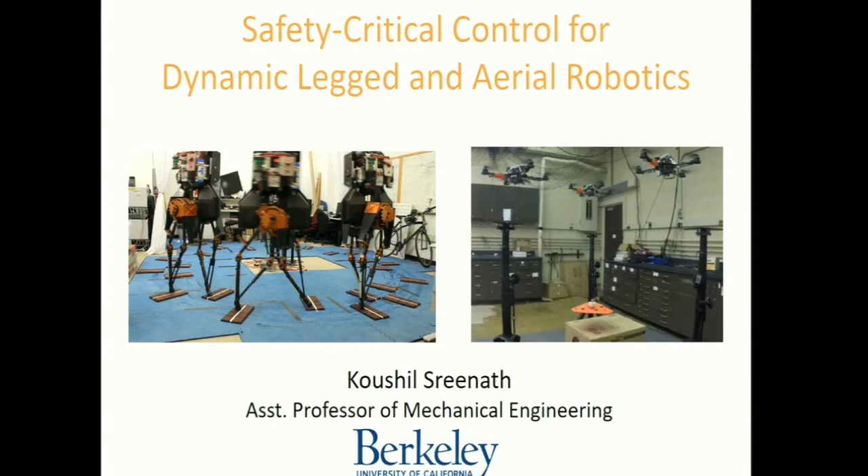So why do we want to work on legged robots? To motivate this, let me show you a video. This is a video of a snow leopard chasing a mountain goat on extremely rugged terrain. What you'll notice is none of these creatures miss a single step. Their feet don't even slip, and this is at high speeds. This is live action. These are amazing creatures. Our robots come nowhere close to the performance capabilities of these animals.

One of the goals that our lab has is to enable robotic systems to operate at such high speed on extremely rugged terrain.

Don't worry, it's a happy story. But actually, it's a sad story in a way. People feel sad for the goat, but actually it's the leopards that are going extinct. You don't realize that.

Another research thrust that we have is to work on aerial robots. To motivate why aerial robotics, let's talk about what's happening or what's going to happen in the next 5 to 10 years. These are urban cities, densely populated. 75% of the world's population is going to be in these dense urban cities within the next 10 years. This is great, but the only problem is if you want to transport anything within a city, it's super hard. We have scenarios all around the world with traffic jams everywhere. So if you want to transport a small package, in terms of time and money, it's going to take a lot of inefficiencies.

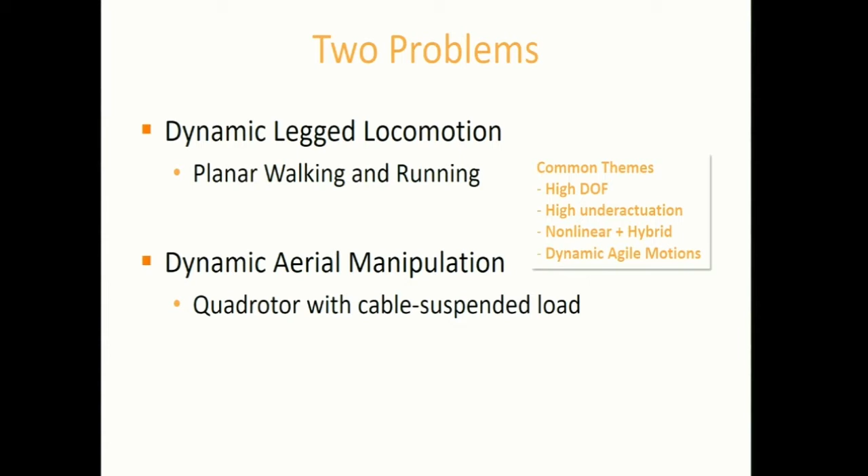Today I'm going to talk about two of these problems: legged locomotion and aerial manipulation. So just to give you an idea, this is safety critical control applied to legged locomotion. You want to walk fast on terrain made of stepping stones. If you miss a single step even by a few centimeters, your whole robot falls. It's a safety critical constraint that has to be enforced while you are also respecting the dynamic constraints.

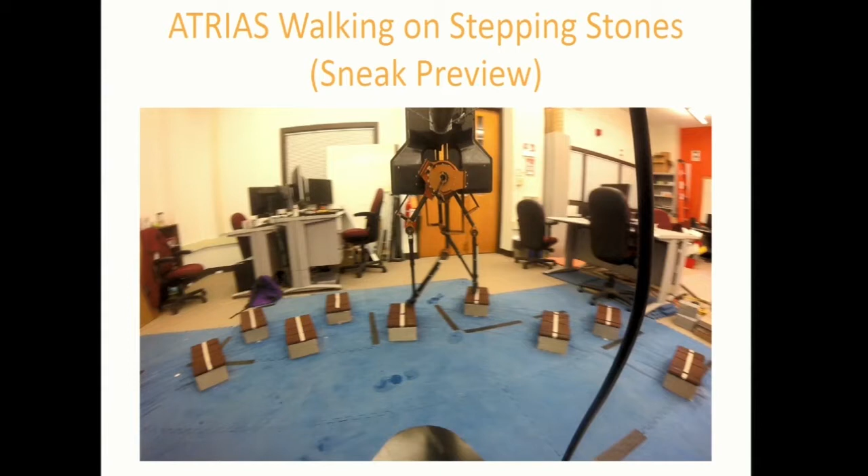The second problem: we want to design controllers that can track the position of the payload along a desired trajectory - not the aerial vehicle, but the payload. There's a lot of under-actuation because this cable is freely suspended, so you can oscillate. We want to solve the problem not only for a single aerial robot, but for multiple aerial robots.

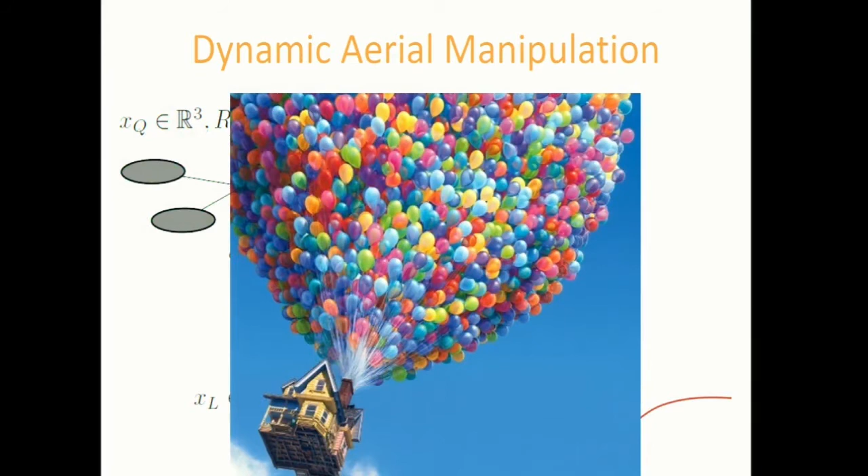This is a challenging problem. The dynamics are complex - you have nonlinear dynamics, you have hybrid dynamics. For aerial systems, you have dynamics on manifolds. The controllers not only have to enforce a static equilibrium, but actually a periodic equilibrium that involves stabilizing to a periodic orbit. You need to achieve geometric control to give you global stability properties.

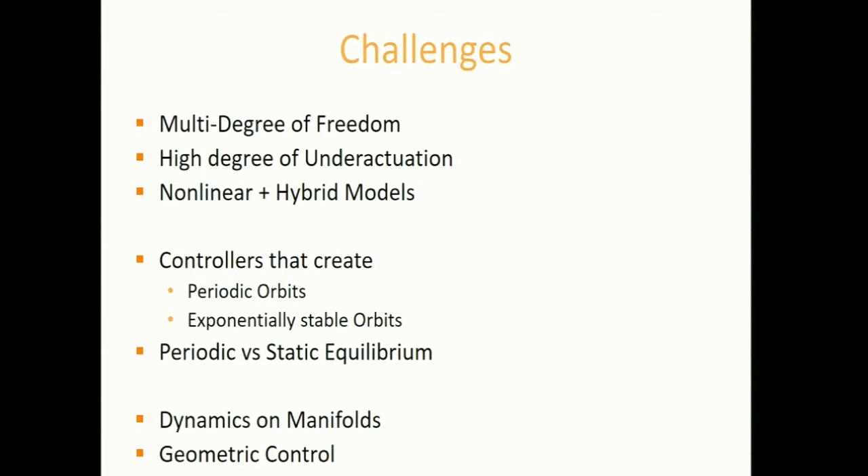Towards this, we'll look at control approaches that go along three different axes. We'll start with standard controllers, then extend that along the constraints axis, the model uncertainty axis, and the safety axis. So we look at standard controllers that can work for nonlinear hybrid dynamics, for under-actuated systems, and for periodic orbits. Now we look at CLF controllers - control Lyapunov function - that can do this. We'll extend this to control Lyapunov function-based quadratic programs where you can enforce additional constraints.

We look at robust and adaptive formulations, which can enforce model uncertainty. We look at safety critical constraints using barrier functions - this is like walking on stepping stones. Finally, we'll put all of these together to do constraints, uncertainty, and safety together at the same time.

First, let's look at the models for these two systems. Whether you take a legged robot or an aerial robot with a suspended payload, both are described by hybrid models - you have a nonlinear, under-actuated model. When the foot hits the ground, there's an impact map that transitions into the flight phase for running or walking. Similarly, when the tension in the cable is non-zero, your cable is taut; when the tension goes to zero, your cable becomes slack, and you have a transition map that gets you back.

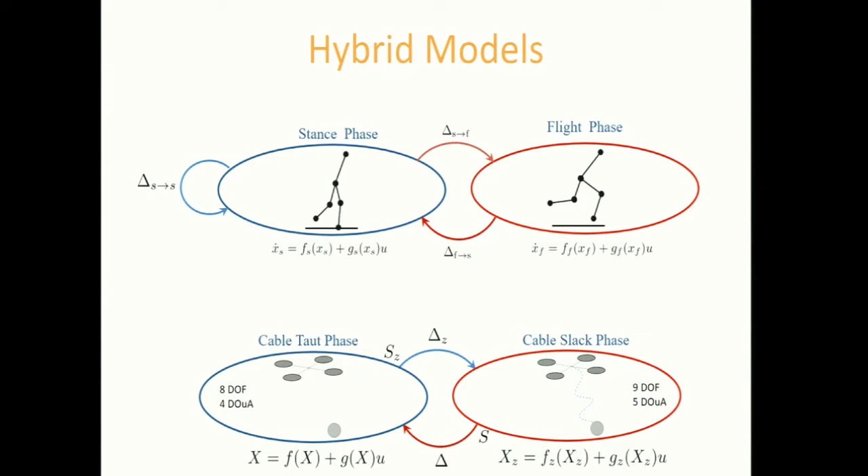If you look at one of these for aerial robots, these models are fairly complex. For this system I'm showing you, it has four quadrotors with a 5-link cable and a rigid body payload. This has 58 degrees of freedom, and 42 of those degrees of freedom are under-actuated - they're not actuated. So it's only the difference that you can control.

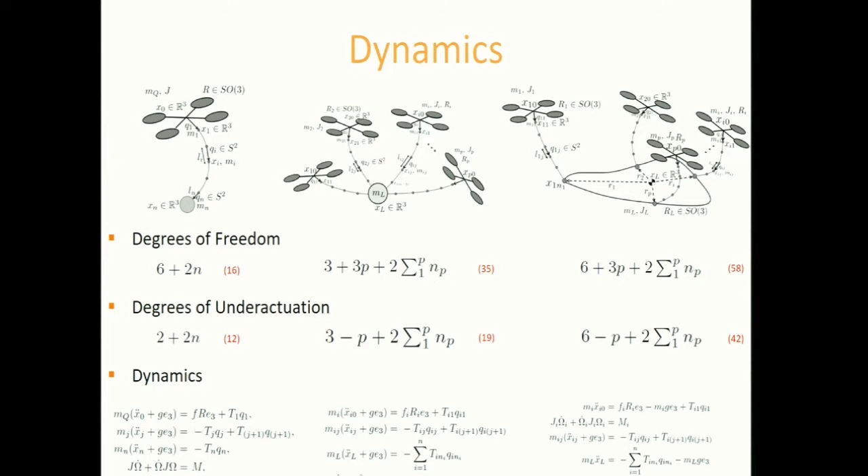You can develop the models for this, and we can also develop controllers for these things. So once again, you want to design controllers to track the desired trajectory, either for a single or multiple aerial robot. Let's dive into control design for a legged robot.

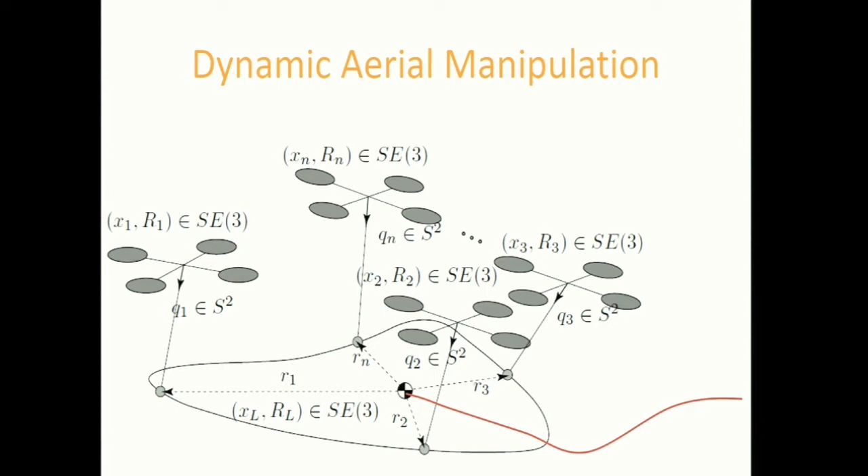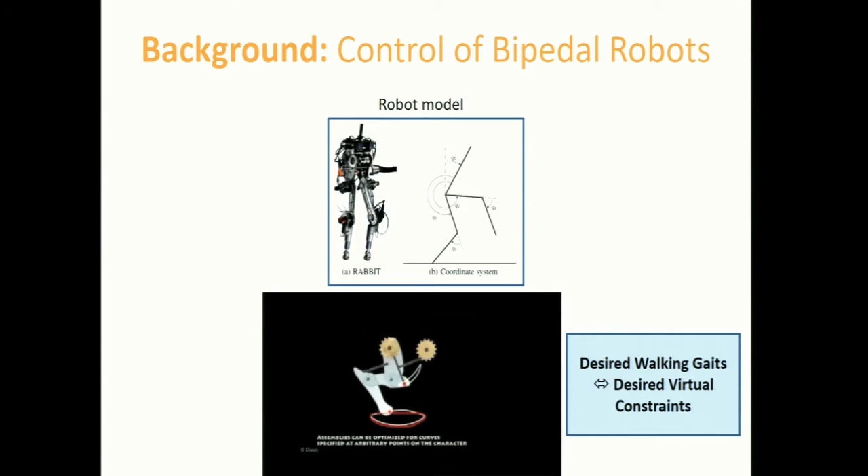All right, so here we have what are called mechanical constraints enforced through gears and links. These constraints can be represented by an equation y. So you drive this y to 0, it enforces these constraints. Now this is a toy.

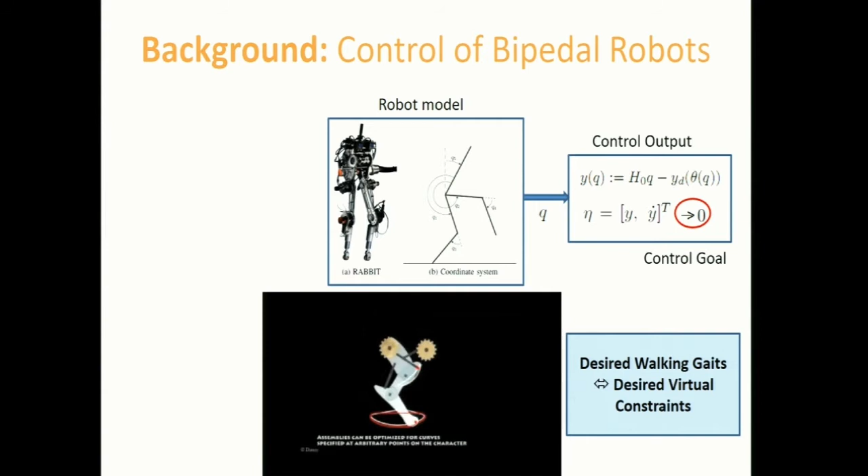For a robot, we don't have these links and gears, but you can enforce and create these constraints virtually through motors and feedback control. So I want to design a controller that drives y to 0 and y dot to 0. That's my control goal.

An easy way to do this is input-output linearization, and you get a system which is linear in terms of the output. So the output dynamics is a linear system. A linear system, you can use your favorite linear controller. Here we'll use a simple PD control, and we can design a walking gait for this system.

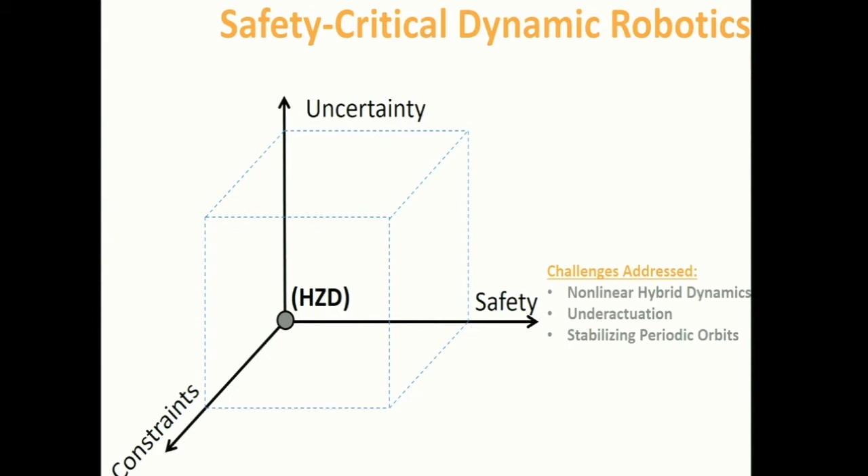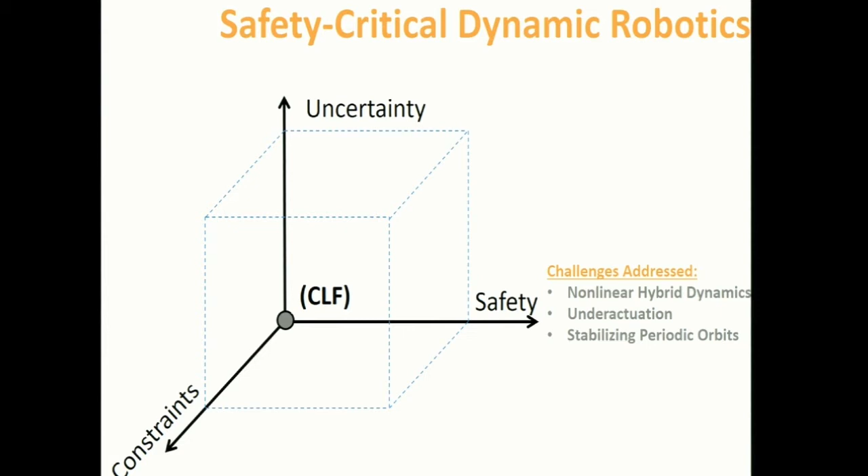So this would give you the hybrid zero dynamics component of the control. What we want is we also want to enforce constraints, safety, and model uncertainty. So let's look at how we can enforce constraints through control Lyapunov function-based quadratic programs.

So let's go back to this. With our control, what we have is a linear closed-loop system. If you have a linear closed-loop system, we can create a quadratic Lyapunov function. And if you design a controller that enforces this particular constraint on the Lyapunov function time derivative, your V goes down to 0 exponentially, the Lyapunov function, which means your output goes down to 0 exponentially, and then it enforces your goal.

One controller that can enforce this is a min-norm controller, which is given by this. So as long as this is negative, your control action is 0. If this is non-negative, it takes the smallest control action to enforce that this is less than or equal to 0.

So I'll show you a video where this controller was implemented on the robot Mabel. You'll see that this part of the experiment, which was the input-output linearizing controller, these are the torques. They're going bang, bang, bang. There's a lot of noise. And once you switch over to the min-norm controller using the control Lyapunov functions, the torques are a lot more smoother, and more importantly, it's energy efficient.

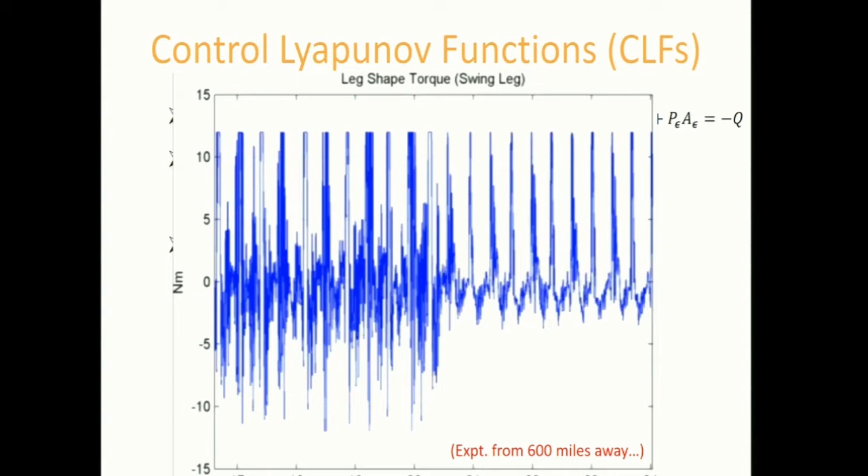So try to listen to the robot here. All right, there's no sound here anyway.

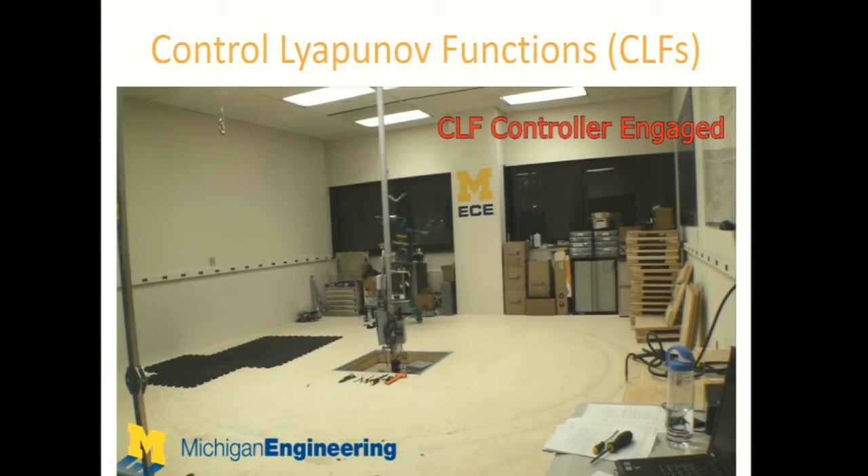So here's Mabel that's walking around, and we switch over to the CLF-based controller. This controller is being executed at 1 millisecond, and it's a lot more smoother and more energy efficient.

Now, once you have this control based on the CLF, you can also create this CLF-QP, which is exactly equivalent to the min-norm controller, which enforces this particular constraint, which is the same thing.

Question: so for the Lyapunov function, this whole design is based on the input-output linearization. That's right. Is it always possible for bipedal robots to do the linearization, or is it something about the structure of bipedal robots that allows us to do so? So for these particular systems, it's possible to do input-output linearization. There could be some designs where it's not possible, so you need to check for input-output linearizability.

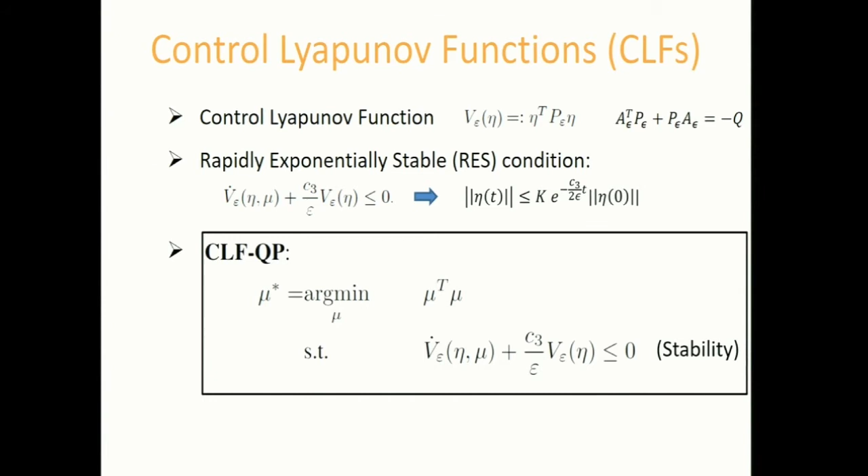Okay, so once you have a quadratic program, you can also put in additional constraints. And these could be in terms of torque constraints, force constraints, friction constraints, and so on.

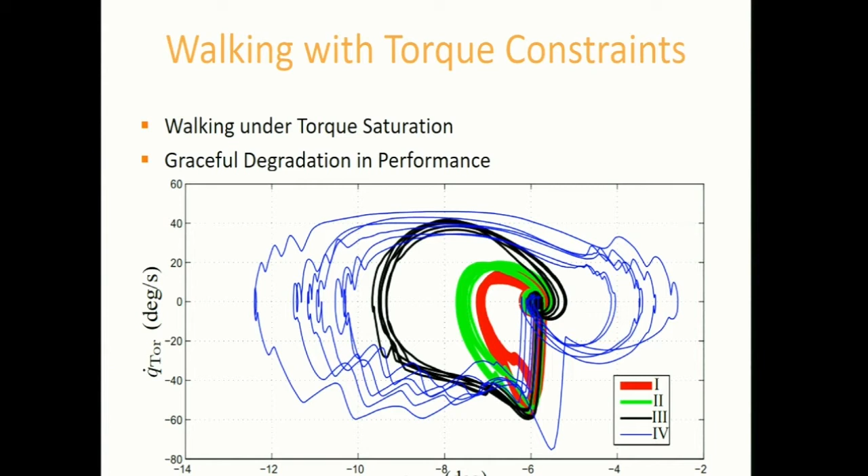Now you can extend these control Lyapunov functions to systems that evolve on manifolds. These are for aerial robots with suspended loads, for instance. So here you can look at the covariant derivative, which describes the dynamics of the system on manifolds. You can create a geometric Lyapunov function, and you can enforce this geometric Lyapunov function-based control.

So here's some examples. This is the largest possible error for the system in terms of orientation. The quadrotor is inverted, the payload is inverted, but the controller is still able to track this desired reference trajectory. You can do this for a single quadrotor with a suspended payload. You can do it for multiple quadrotors as well.

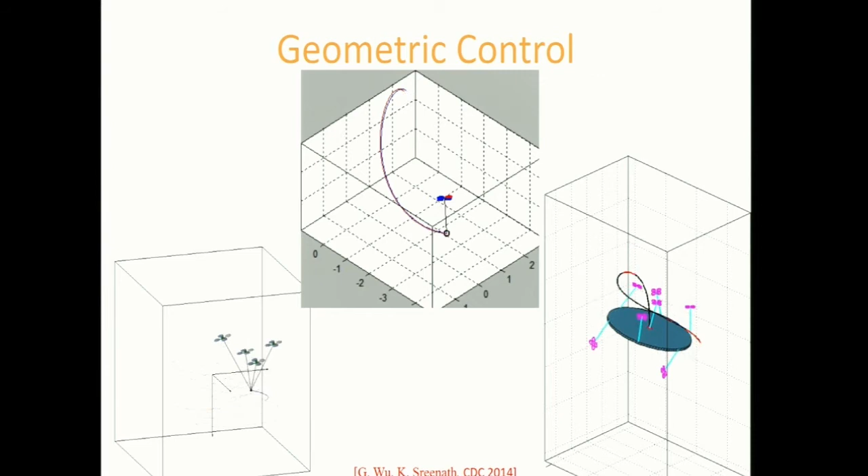Now we can also look at the case where you have a single aerial robot, but the cable is now not one link, but made of multiple links. So here the goal of the controller is to make the payload follow this desired trajectory. So we started off with a hover configuration.

In the next video, we'll start off with the inverted configuration. So there's a huge error in the attitude. The controller recovers from it, and it's still able to track this trajectory. So you have global stability properties for configuration errors and orientation.

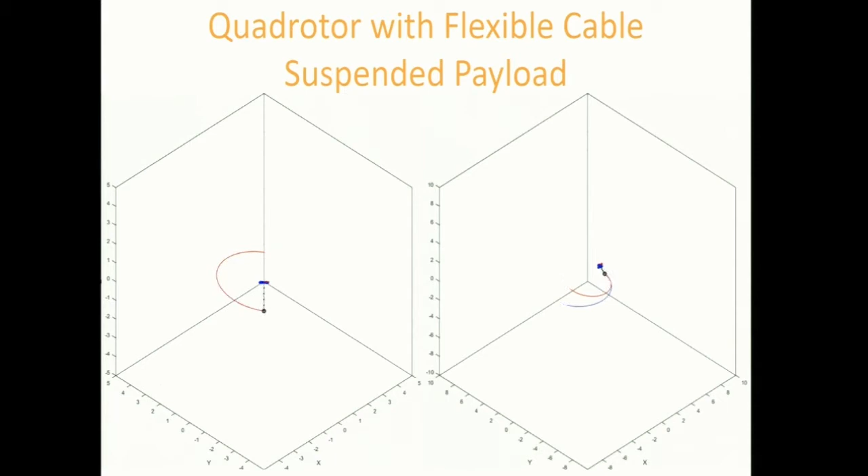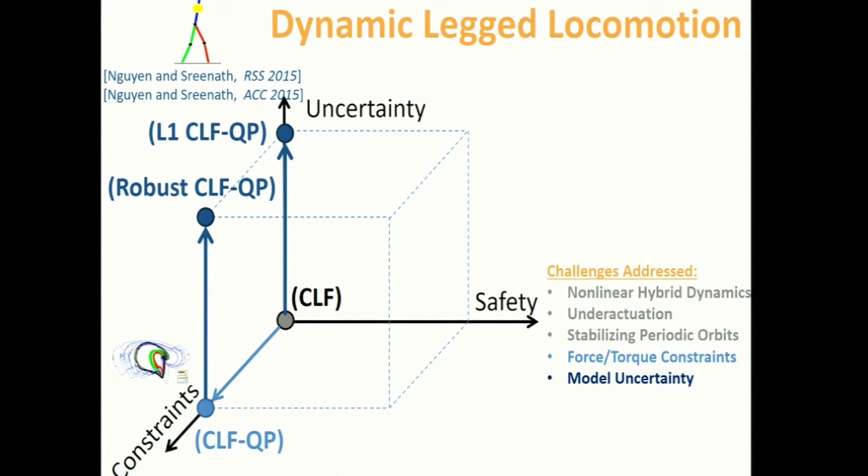All right, so we've looked at control Lyapunov functions for quadratic programs. Now let's look at model uncertainty. Our group has looked at robust and adaptive formulations to address model uncertainty. I'll talk about one of those and present the results for the second one.

What we want is walking robots that can walk without the controller being aware of additional uncertainty added to your model. This isn't just an example from the web, it happens in real legged robots. There's model uncertainty because the models you derive aren't always accurate. You have parameters from carrying packages that you don't know, ground disturbances could be model perturbations. So there's a huge amount of uncertainty.

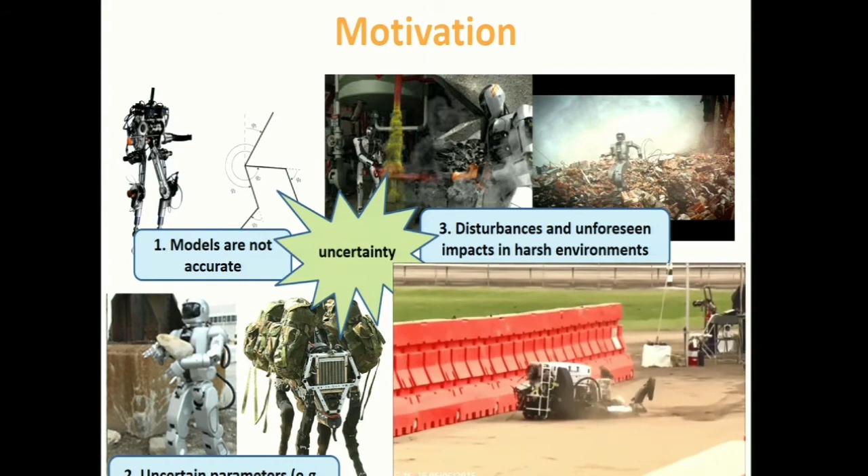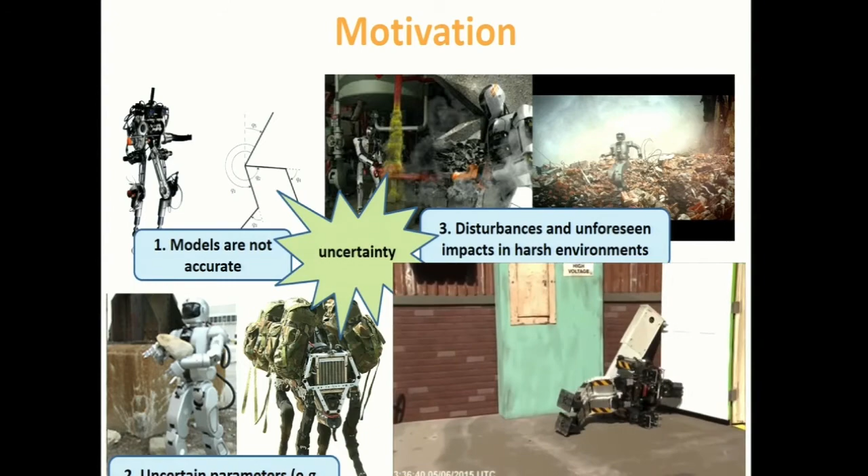Here's a video, overused, from the DARPA Robotics Challenge. I would say most of these failures are because of model uncertainty. The methods applied didn't take into account the uncertainty. Almost every single robot in the DARPA Robotics Challenge fell, except one.

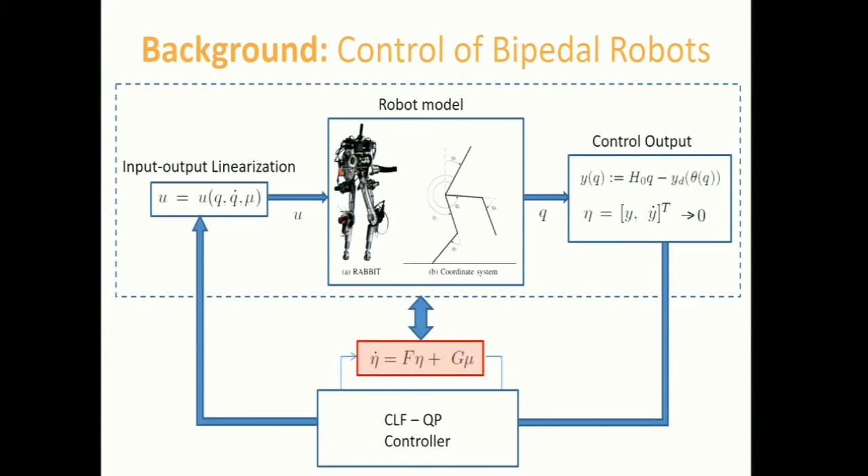So let's look into how we can address model uncertainty. What we saw before, we had a linear system, and we can have a control Lyapunov function-based controller for this. Now when you have model uncertainty, this linear system has unknown parameters which are nonlinear in terms of the unknown model. You want to design a controller for this system where delta 1 and delta 2 are not known.

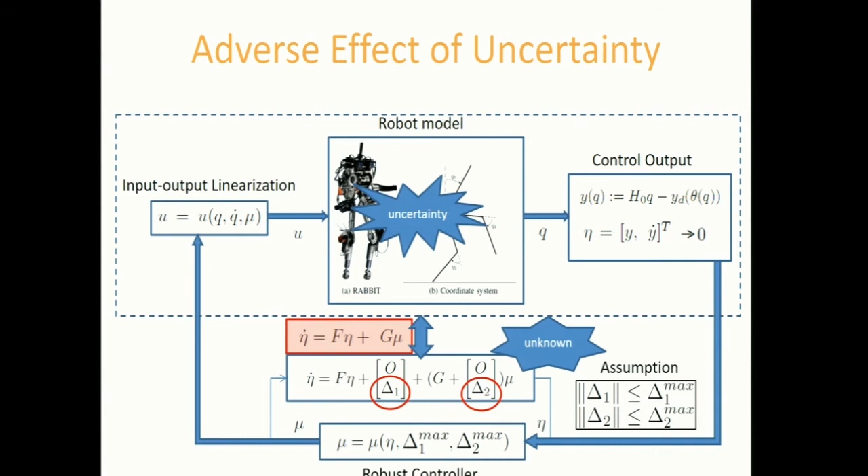If you make an assumption that these uncertainties are bounded, then you can design a controller based on the bound. Looking at Lyapunov functions, the condition we wanted to enforce was this, but because of uncertainties, we now have this new constraint. If these uncertainties are bounded, then enforcing this max inequality constraint still guarantees convergence to zero for the Lyapunov function under these constraints.

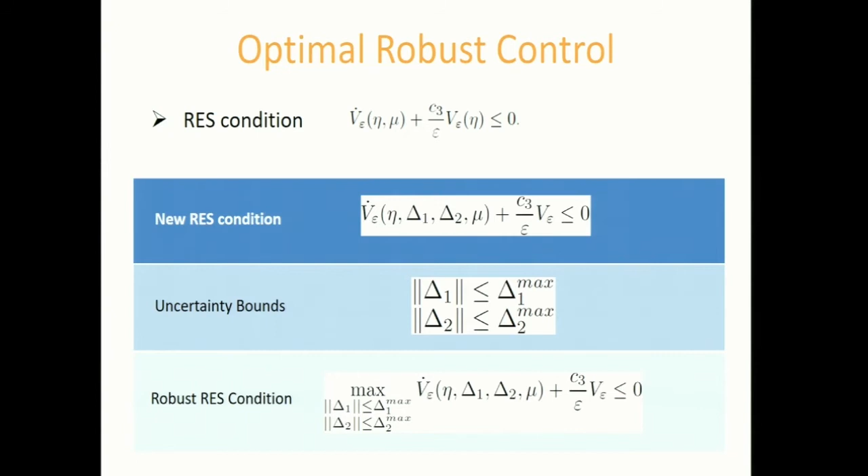So your CLF-QP now looks of this form. The key thing here is your Lyapunov function is still affine in terms of not only the control input, but also the model uncertainties. And this lets you implement this as a quadratic program.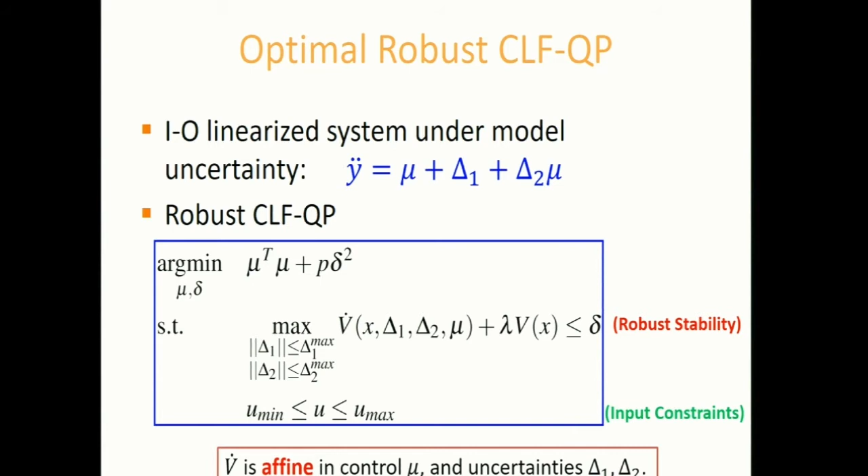So we're looking at some experimental implementations. Here is a 70-pound mass that's attached to the robot. So we can stand, we can do a little bit of walking. We're trying to submit this as a journal soon.

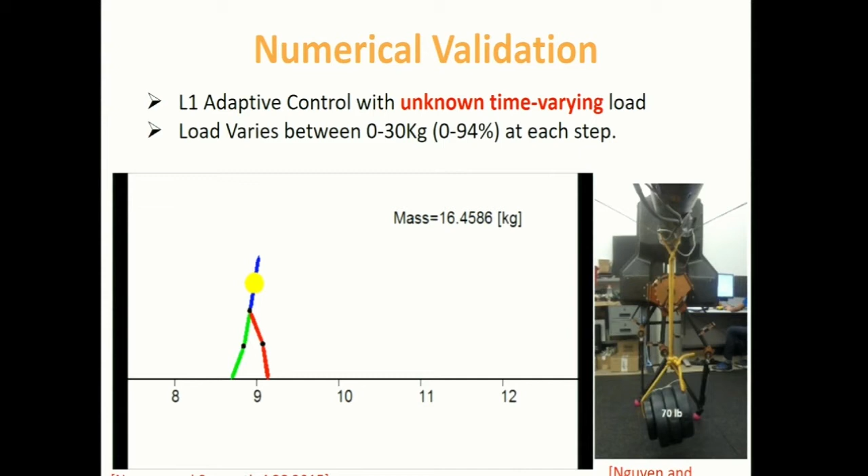So we've seen legged robots. This controller can also be applied to aerial systems. This is fast motions with large errors, large attitude maneuvers. This aerial robot has a 100 gram mass payload, about 10 centimeters from the center of mass, and the geometric adaptive controller is still able to regulate and track a desired trajectory, a circular trajectory at 3 meters per second.

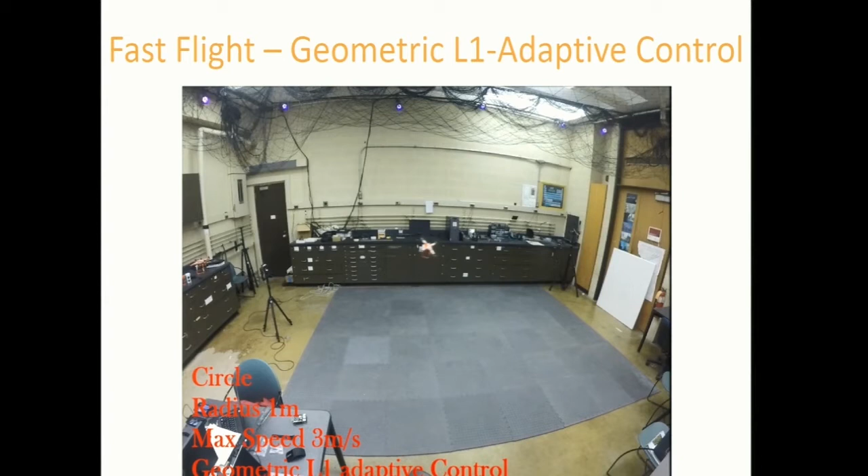All right, so we looked at model uncertainty. Now let's look at safety critical constraints. So this is stepping stones. Humans are very good at walking on stepping stones. Now you want to make robots do the same thing.

So this little kid can also do this pretty well. On this last step, he actually does nail the stepping stone, but he's not able to account for the slipping, he's not able to account for the friction constraints. So he violates the friction cone and he slips. So when you design controllers for bipedal robots to walk on stepping stones, you not only have to enforce the safety constraints, but you also have to enforce the friction constraints.

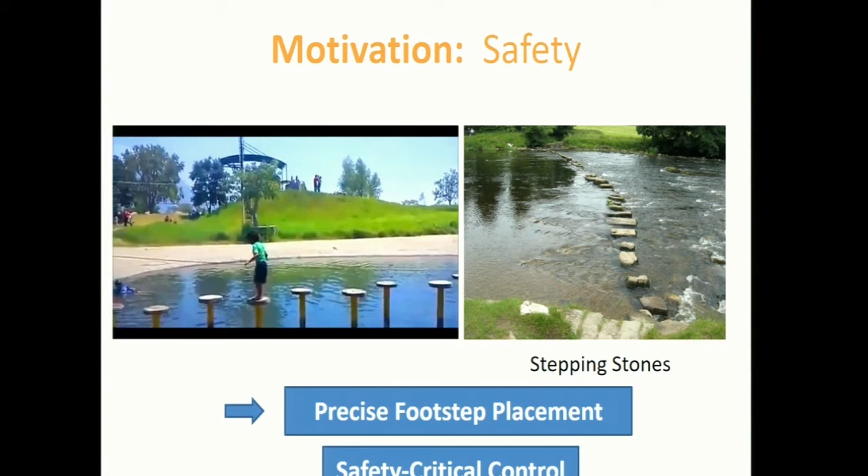So anyway, we want to do the safety critical constraints in the form of walking over stepping stones. Our solution uses something called barrier functions, control barrier functions. We looked at control Lyapunov functions, now let's look at what control barrier functions are. You want to enforce the constraint of the form given by this. B is always positive.

The way we can enforce the safety constraint is through the control input. If you look at the time derivative of B, when it depends on the control input, it would be of this form. And if you enforce this constraint on the time derivative of B, then your B is guaranteed to be positive.

Let's say my B was initially this. If I'm enforcing this particular constraint, my state evolves such that I'm in this green region, lower bounded by this red curve that goes exponentially to zero. So you're indirectly enforcing the safety constraint. It's very similar to a Lyapunov function constraint, the only difference is you have a greater-than sign instead of a less-than sign.

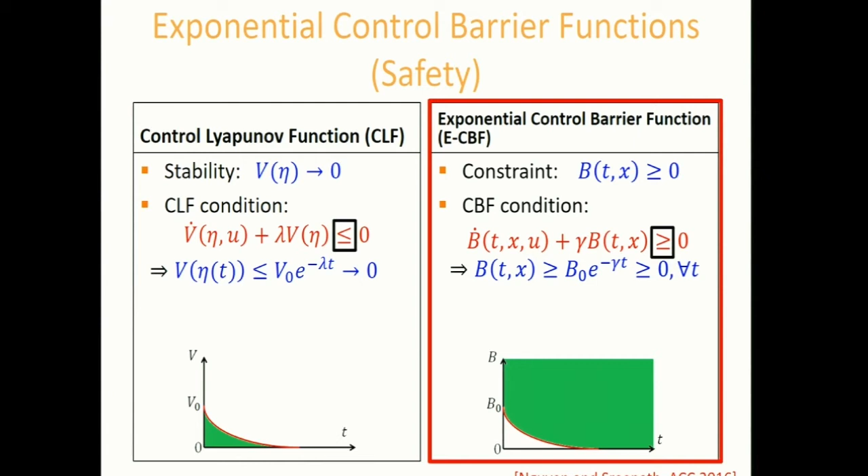Now it's possible that the barrier function may not have relative degree 1 as shown here. It could have higher relative degree. Then you need to look at higher time derivatives of the barrier function, and you can still enforce a constraint of this form. You can put both of these together to create a control barrier function, control Lyapunov function based quadratic program.

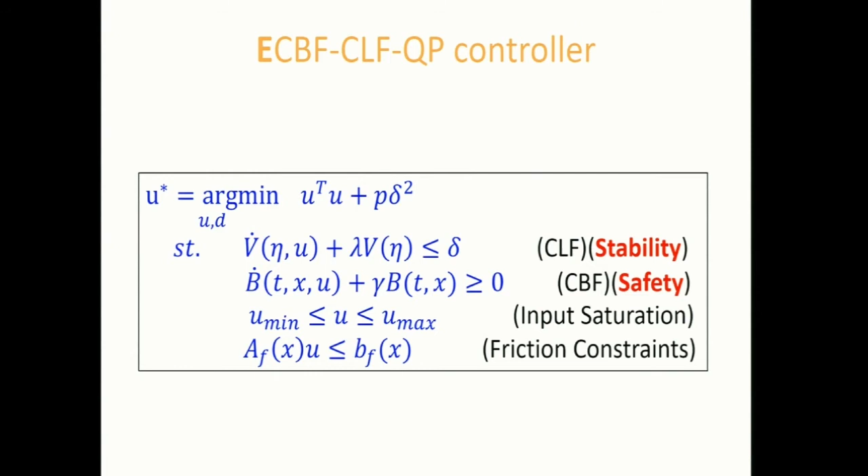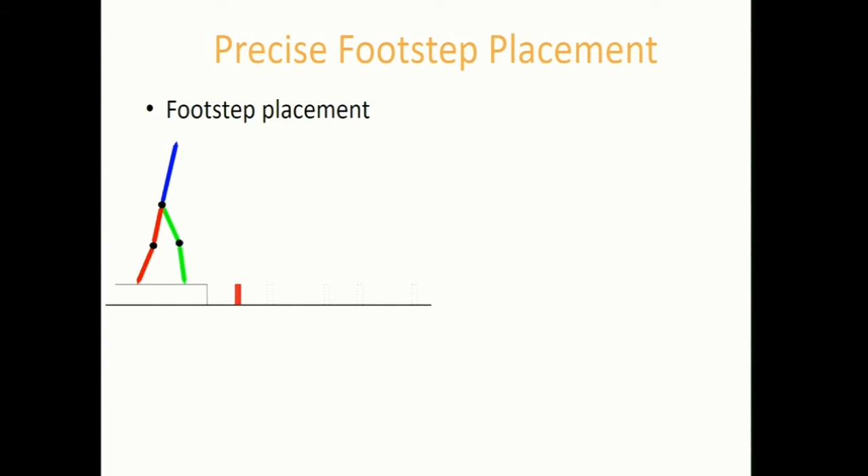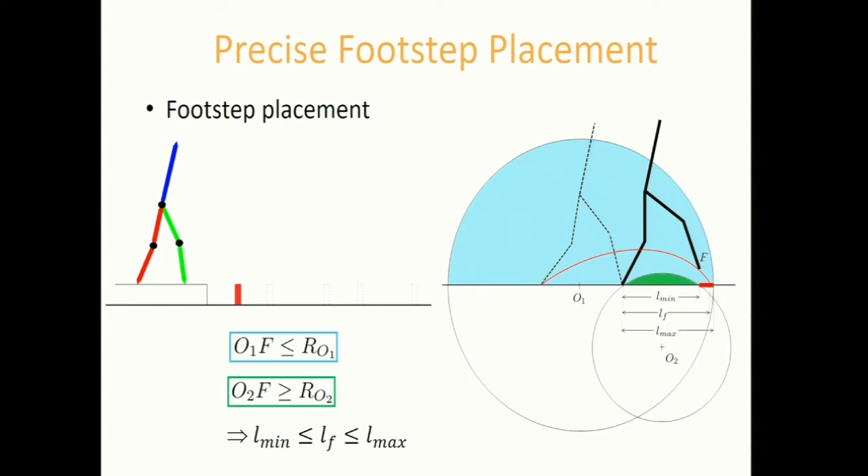So you can see simulations. This is the model of a bipedal robot called Rabbit. The controller is provided knowledge of only one stepping stone, so you don't know the entire terrain. As you take one step, your controller is given information on where the next step is. So you have to enforce a time-critical safety constraint of placing the swing foot on the next one.

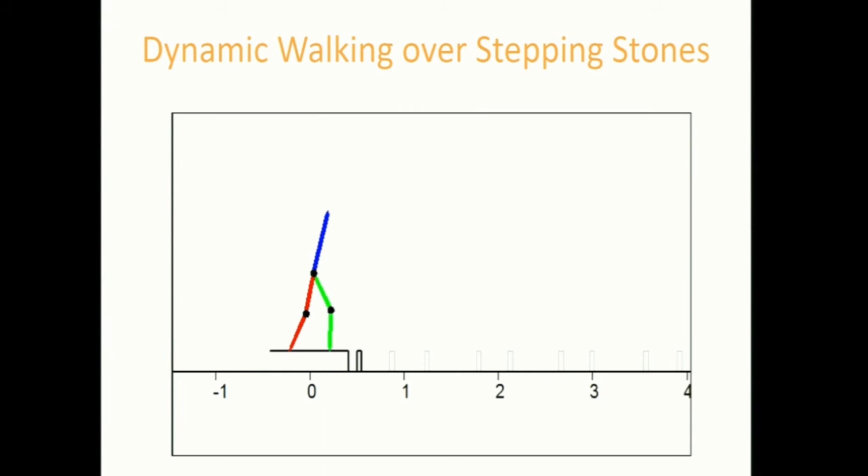This method also works on high-dimensional humanoid systems - this is 22 degrees of freedom, 44 states. Here, not only is the step length changing, but the step width is also changing.

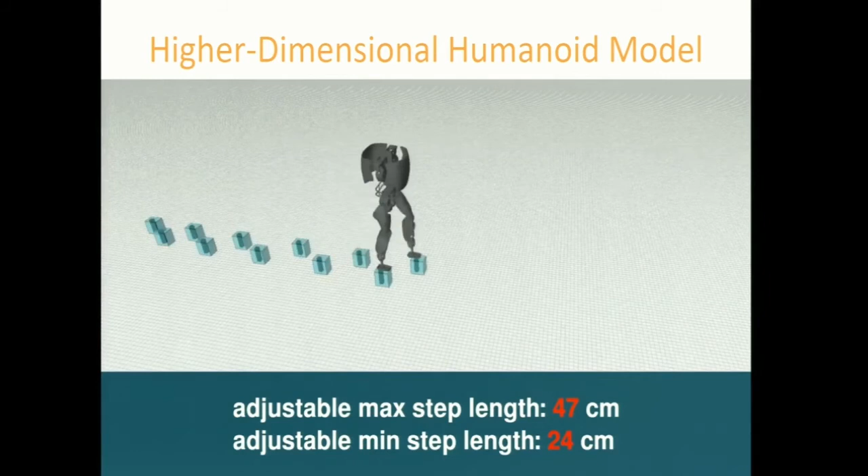We can also handle more complex terrain. Here, not only does the step length change, the step height also changes. And here, all the robots have point feet. This is a model of the robot ATRIAS.

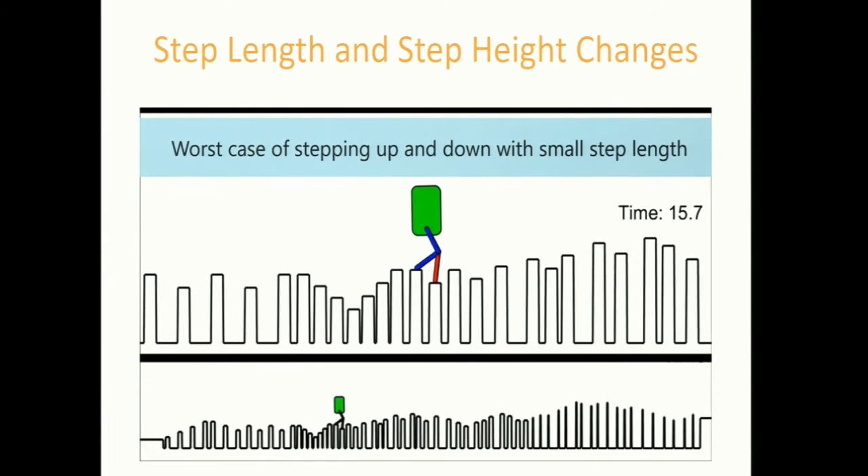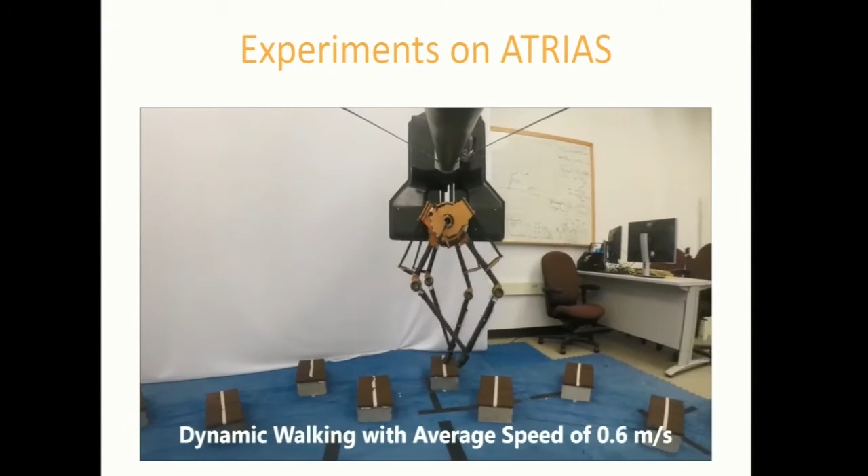It's pretty cool, right? Now, everything works in simulation. So here are some experiments - these are very recent experiments. Here's ATRIAS working on cinder blocks.

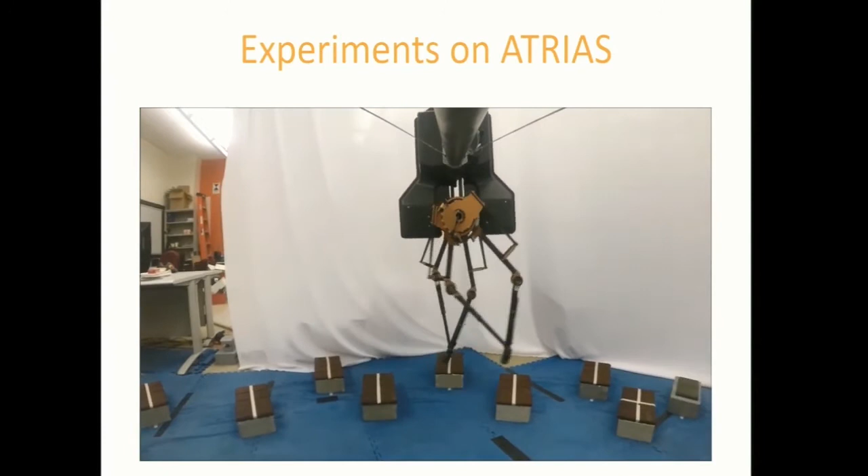The controller is provided knowledge of one step ahead of where the stepping stone is. The stepping stones are distributed randomly, so step length changes every step. Here we are not using vision yet, but we are planning to. So that was step length - we can also do step height.

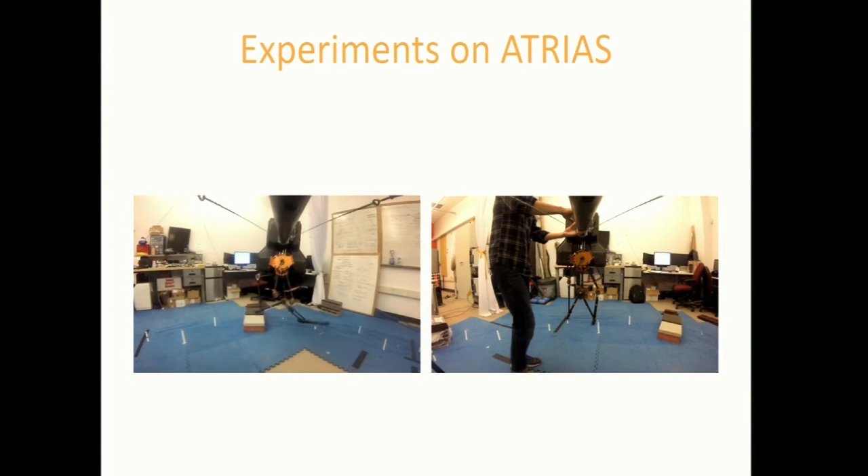If you do things wrong, robots break. So here's an example where we can do step height.

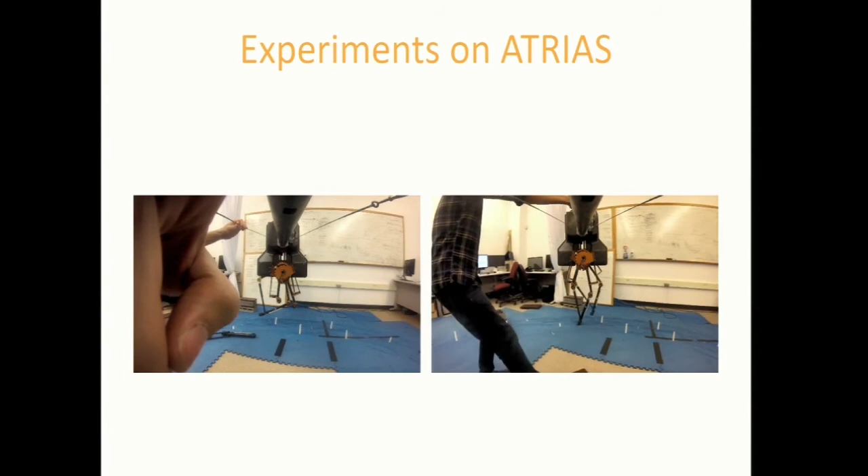Once you have step length and step height, you can combine the two of them. Here are recent results where step length and step height vary randomly. We have only a finite amount of step height given the size of this cinder block, but we can still achieve dynamic walking at an average speed of 0.6 meters per second.

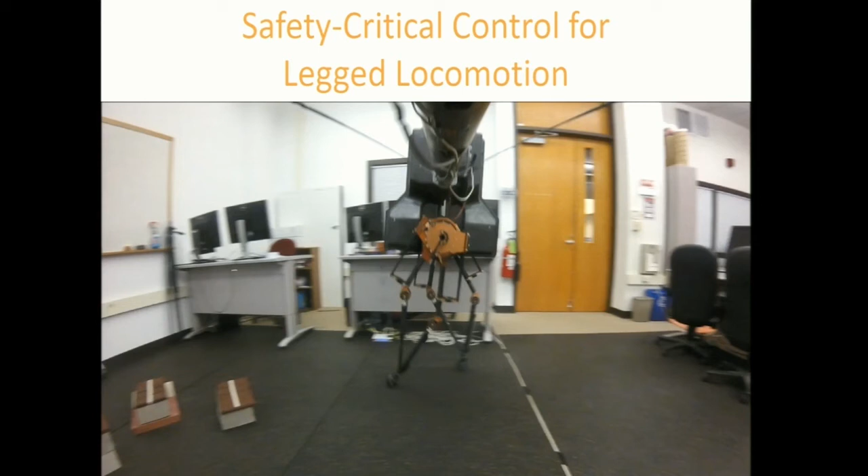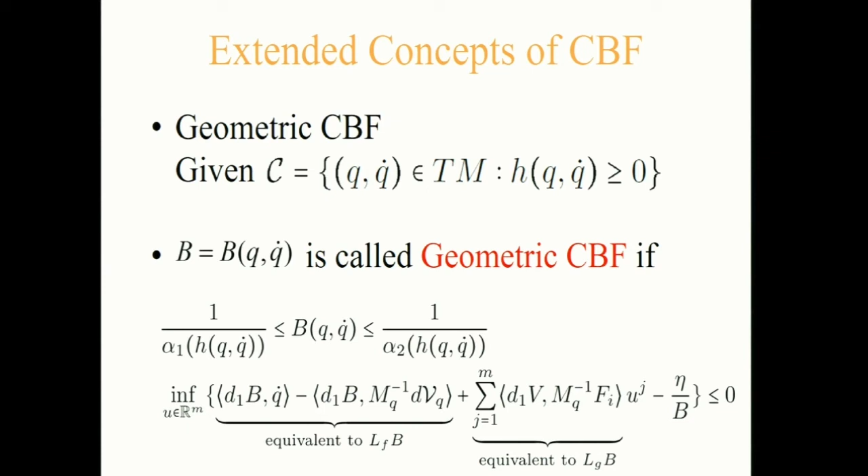These control barrier functions can also be implemented on systems where the dynamics evolve on manifolds, so you can create geometric control barrier functions. Then you can enforce safety-critical constraints for quadrotor systems.

Here's a planar quadrotor trying to avoid this obstacle. The goal is to follow the desired trajectory. There is no replanning in either of these two motions - it's a low-level controller that's guaranteeing safety.

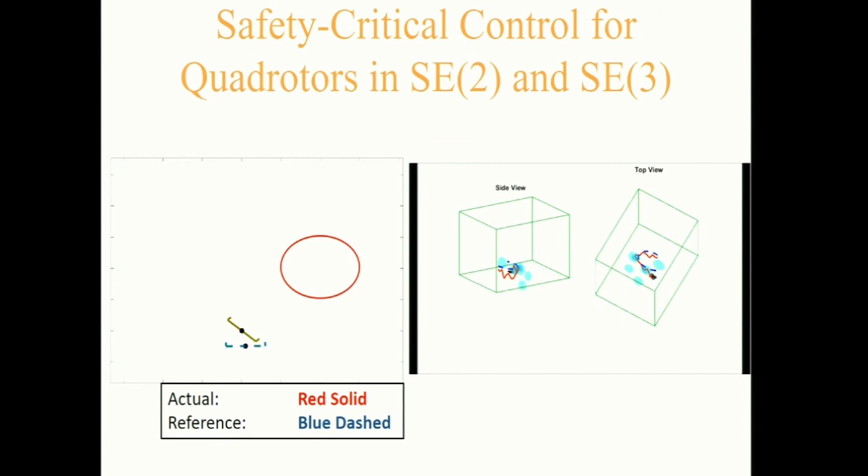We have some preliminary experiments here, trying to do teleoperation. Imagine you have a pilot who is still learning, not advanced. You have safety constraints that you want to stay within this virtual box. The pilot gives commands, but if the system knows you're going to violate a safety constraint, the controller would override the commands from the user. This is all done without any replanning.

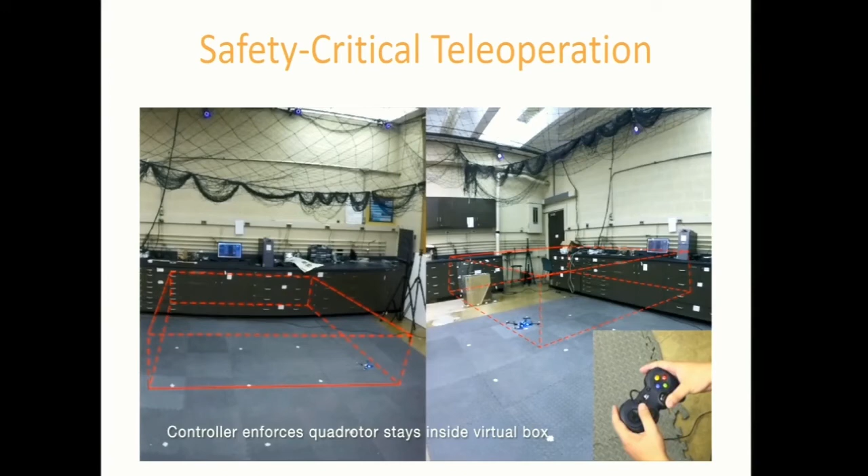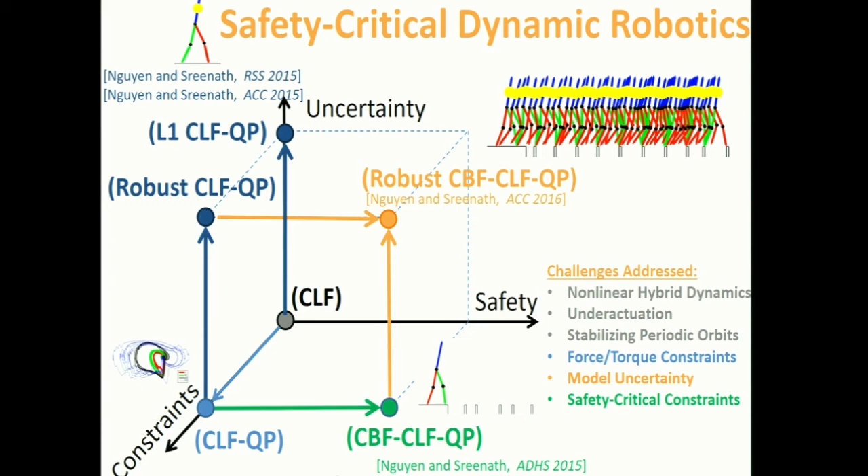So we've looked at constraints, we looked at model uncertainty, we looked at safety-critical constraints. Now let's see if we can bring all of these together, where you have robustness and you have safety constraints. The idea is to merge the results from this as well as stepping stones.

If we look at the time derivative B dot, which is a barrier function, it's dependent on the model uncertainties in a similar way that the Lyapunov function is dependent on this. Once again, we can make an assumption that your unknown parameters are bounded, and you can create this max inequality.

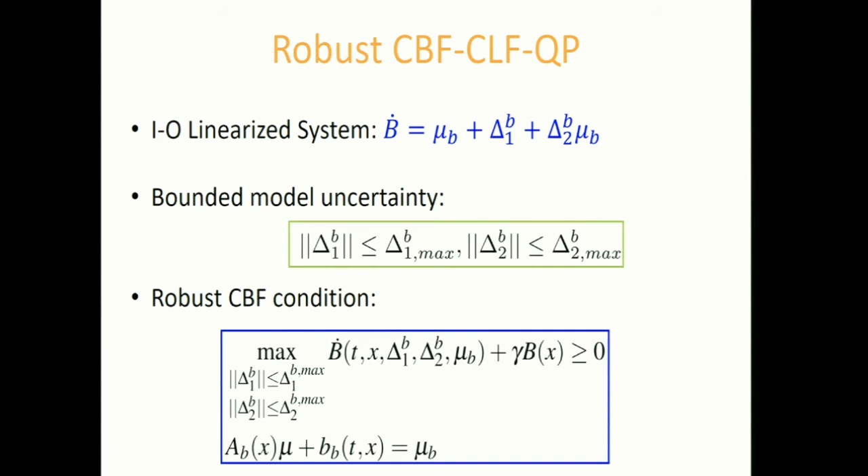So now we have this huge, robust control Lyapunov function, control barrier function based quadratic program, where you can solve this and enforce constraints for robustness while also giving stability and safety guarantees.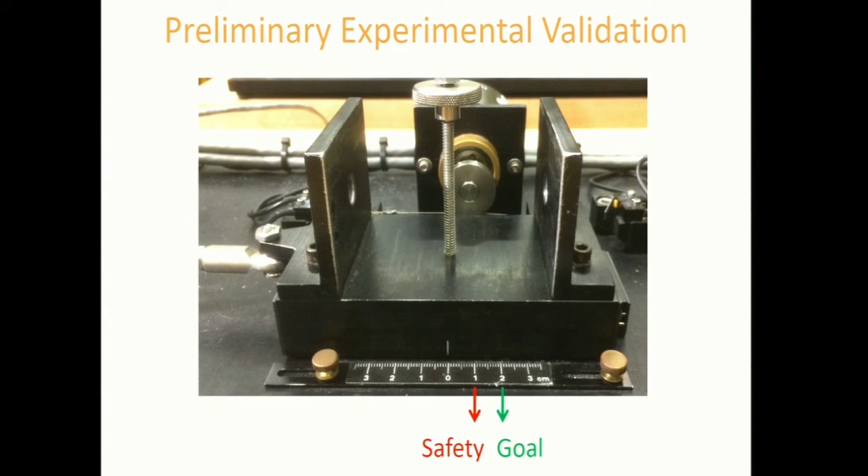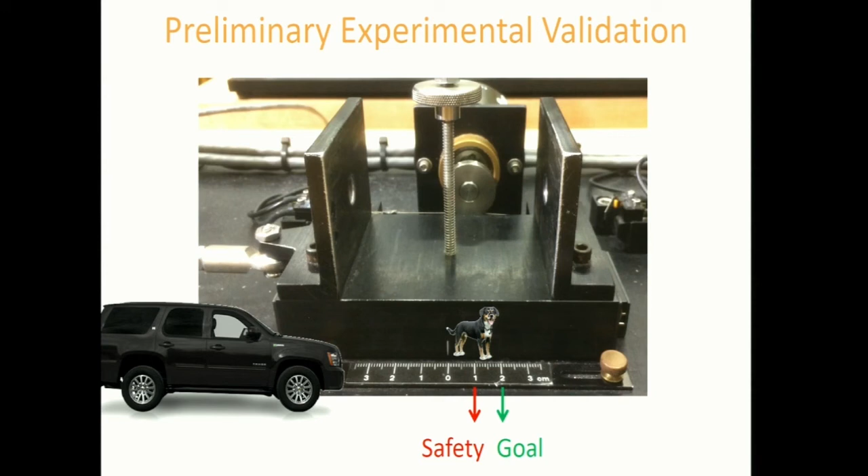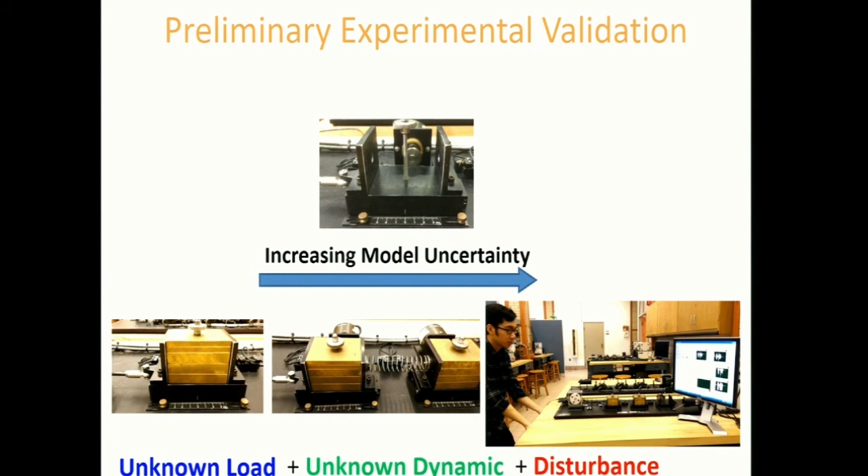So here's a small cart. The goal of this is to drive from this position at 0 to the goal at 2. But now you have a safety constraint to avoid going past 1. So we take the system, we throw in a huge amount of model uncertainty. You can put in a huge amount of load, unknown dynamics with a trailer, unknown disturbances, and now the controller can still enforce the safety constraint.

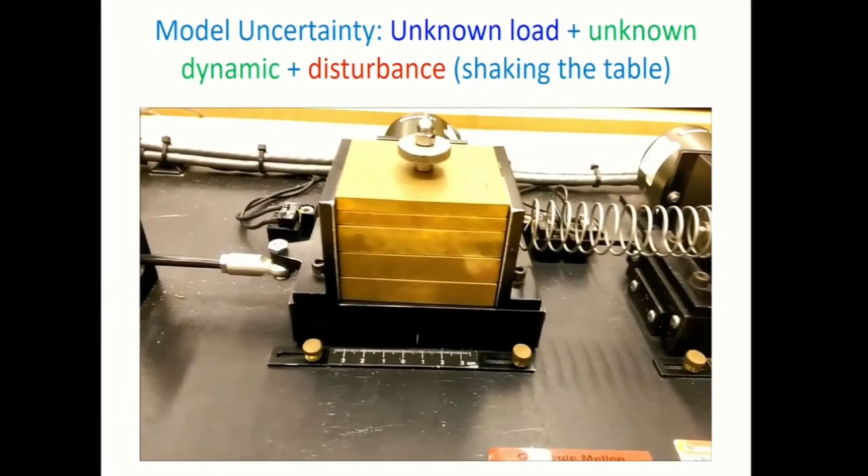So if you look closely here, you see this position does not violate the safety constraint of 1. Your cart position is always upper bounded by this 1. So your controller enforces that you're always below this, despite all the model uncertainty coming into the system. So we have good results on safety critical control with model uncertainty.

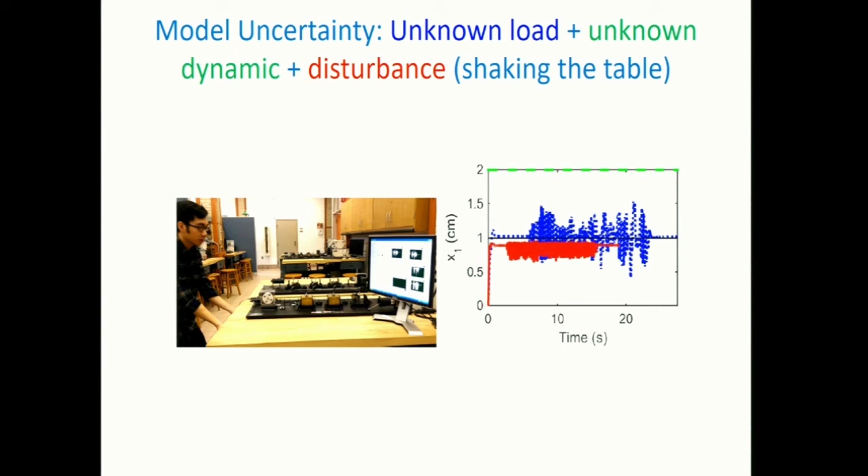Now let's see if we can combine this with perception. So where we are headed is towards safety critical perception. If you have control that works really well, but your perception module gives you the wrong estimate, when you combine the two, you can no longer enforce a safety constraint.

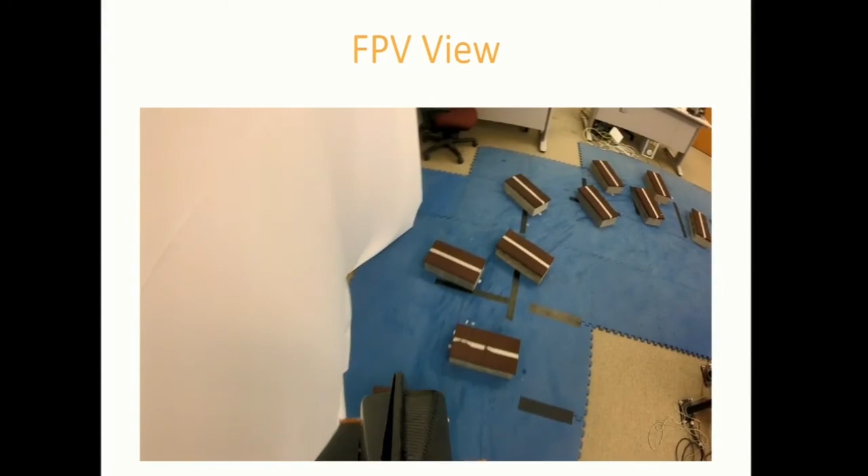Now perception is a hard problem. If you look at an onboard view, you're trying to place your feet on these stepping stones. You can hardly see the stepping stone that you're going to place your foot on. You can only see a few steps ahead.

So a few simplistic vision examples on this. We have a camera mounted here doing a simple depth segmentation that finds these stepping stones, and you can still place your feet on these. What we want to do is combine this with deep learning.

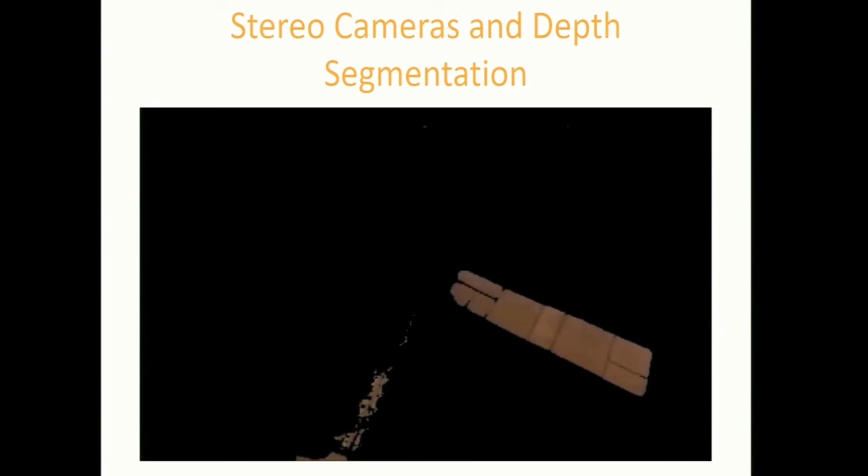So where you have a CNN that does the perception, provides you some guarantees on its estimate, and then you combine this with the controller that provides safety guarantees.

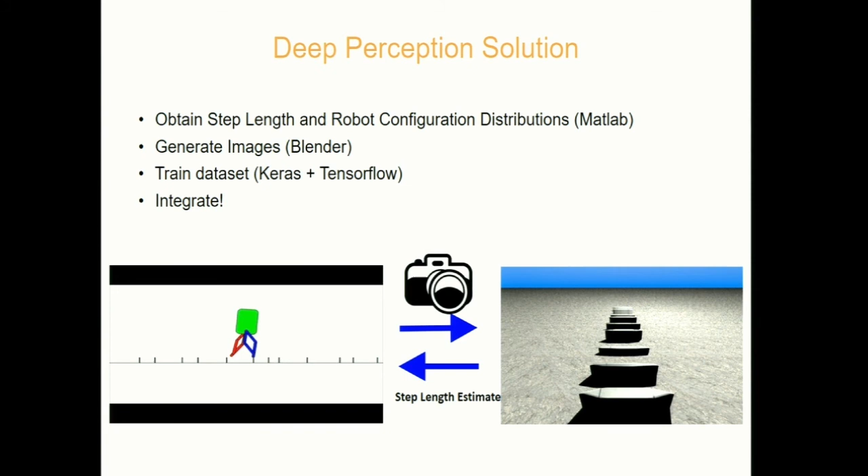So can we generate synthetic terrain data, feed this through a CNN, get a model, and then do experiments with this? We've generated synthetic data with various amounts of textures for the background and foreground, and created a simplistic network with 6 layers - 3 CNN and 2 fully connected networks.

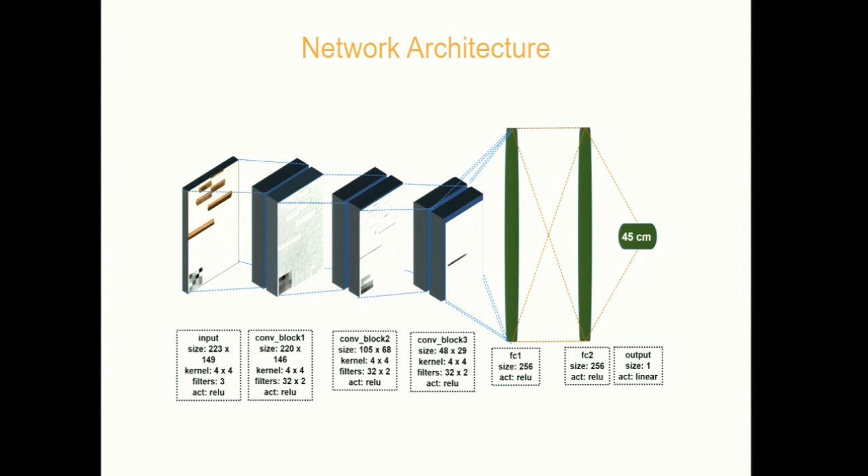Now the goal here is to design and train a network where the worst case is bounded. If you work in deep learning, you can get a very good mean in your estimate, but it's possible that a few estimates could be quite off. Even if you get one single thing that's off, and you send that to your controller, it will try to enforce that wrong estimate, and your safety constraint will be violated.

So here, what we've done is we're trying to train the network so that we can upper bound the error to some extent, and this was done manually.

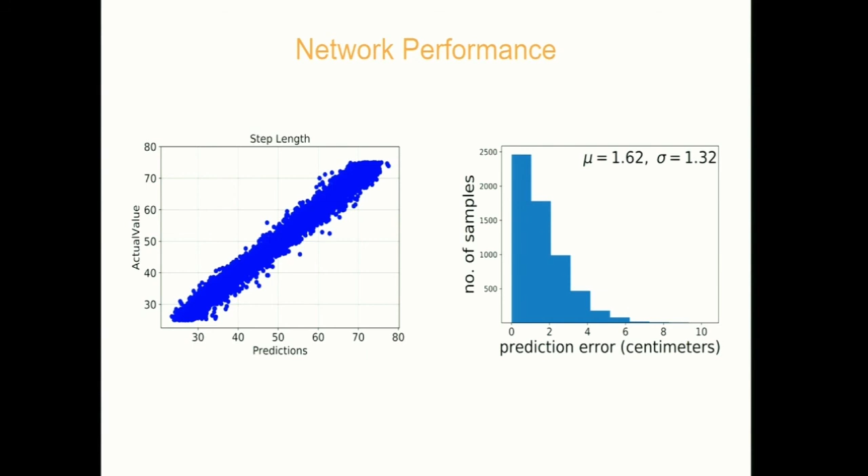So here's some of the best predictions. It generalizes fairly well over texture, exposure, and shadows, and it does pretty poorly on long shadows and reflections.

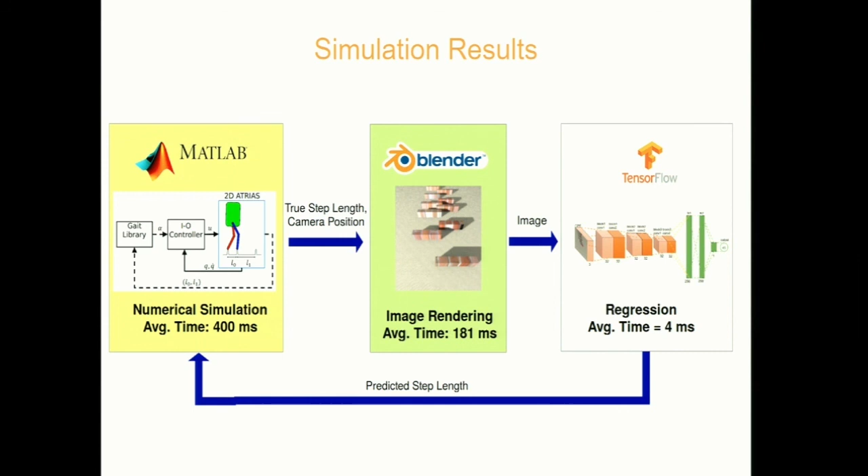We can test all of this in simulations. So you can combine a fairly accurate dynamical model in MATLAB. You have Blender that synthetically generates this terrain data. You have TensorFlow that takes this visual input and spits out the step length to take next. You have a safety critical controller that's running, and you close the loop, and what you get is a perception model with the safety critical control.

So we're still working towards providing guarantees for perception. Here you get each image for every step - it's very hard to see here - but you can see the predicted and the actual ground truth of your step estimate.

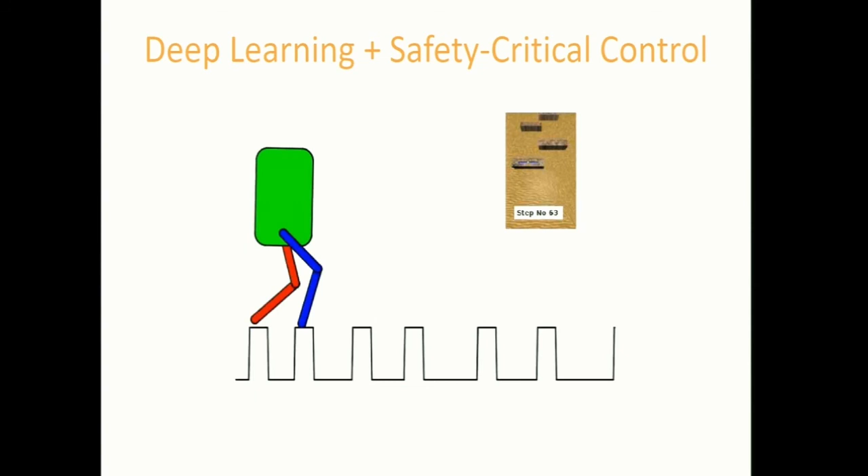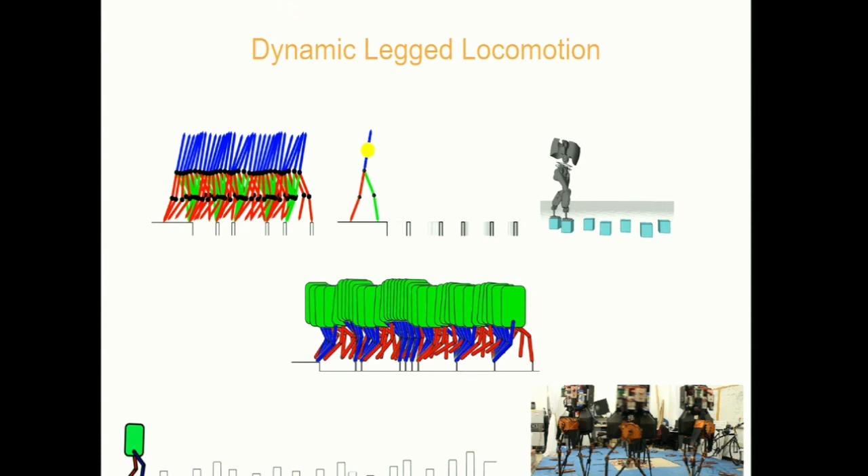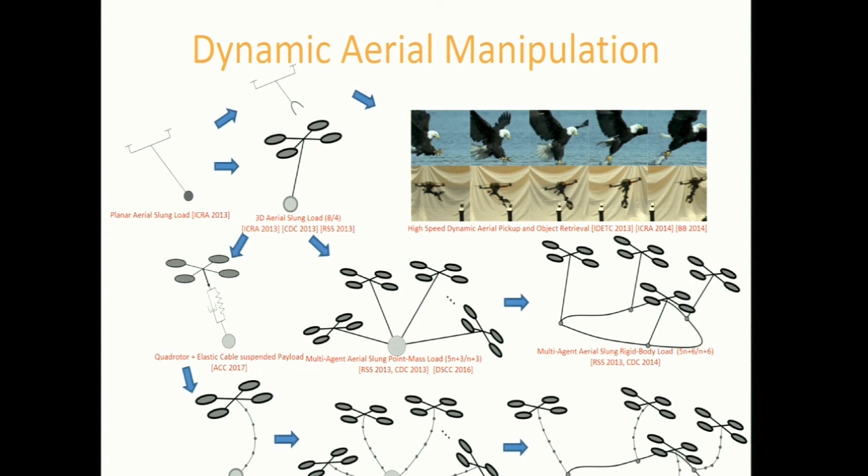So I've shown you a lot of things in legged locomotion. We have results on stepping stones with dynamic motions, and results on aerial manipulation that cover a whole bunch of different cases. So I wanted to spend some time to get some ideas, to get some thoughts for future collaborations. Thank you for listening to me. Happy to take any questions.